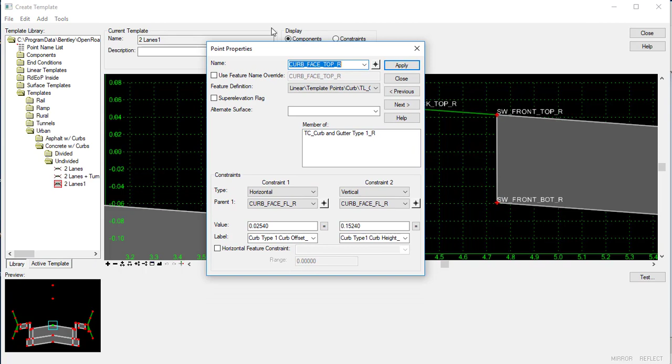So in my template, you need to first check about the option here. So you can check if you double click the point, you will see there's a vertical with this point, and this is 0.15240, and this is a vertical height.

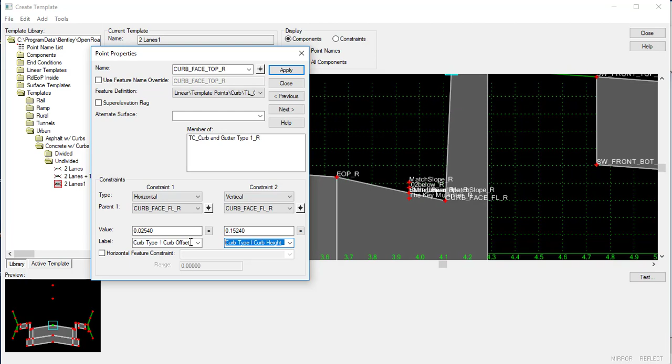I want to change the value, so in vertical this parent value I add a new value called curb design height here. You can use this one. Of course you can also change and test the point control by vertical to see what happens if you change the vertical. So now we do both sides.

So we just save it, and go back to the corridor here. For example, I want to change here. So the first thing I can do is use a tool called parametric constraint. So we can create a parametric constraint.

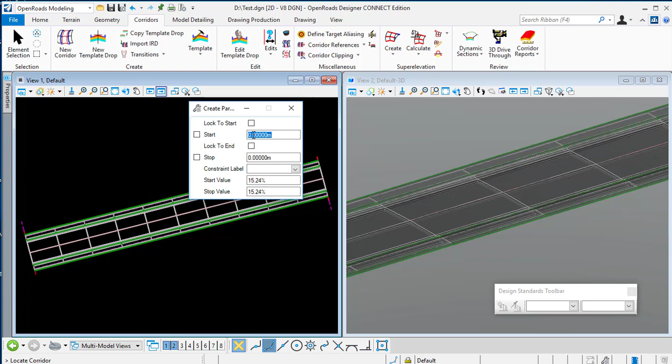For example, I want the curb to start at station 50, and then spend about 0.5 meters to change here.

So what I'm doing to this drop curb, I just select the corridor or linear template. While I'm started, I just create start from 50, enter, lock it, accept, and then go to start from 50.5, lock, and stop here.

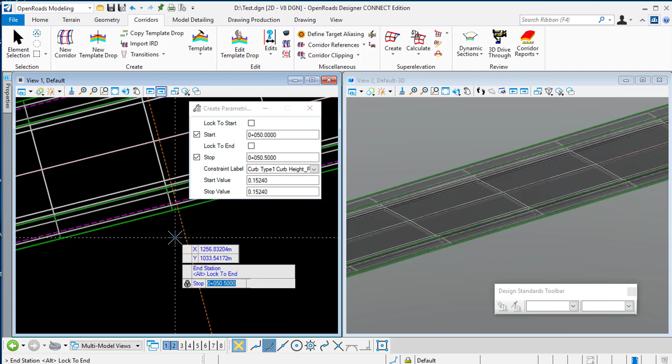So after I accept that, I will change my label here. The label is curb height right hand side. So I just click accept, and then start is 0.1524, start, and then stop will be 0. So I just click accept.

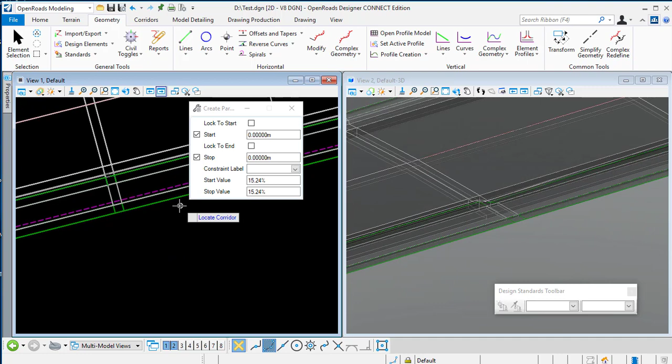And you will see it will start to change the value here. So after changing the value, the next one is you can go back to the corridor here, always using this corridor object. Select this component again and you can see the template drop, or even you will see the parametric constraint here. So it helps you to do it very quickly.

For example, I just copy the setting and paste it here. So the next one you may think about is from 0.5 to here, maybe I need 2 meters.

So I will add 2 meters here, 0.5 as well. So after I start value, it should be 0.0. So it makes sense that from 0.5 meter it changes to 0, about 2 meters, or even I should make it like 4 meters for the car to enter here.

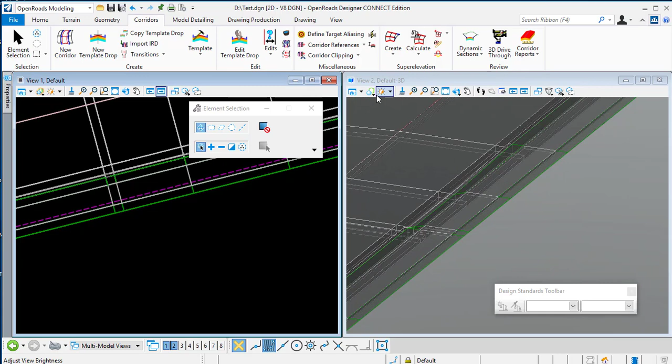So after you change it, if you close it, you go back to the levels here or the model, you will see it will drop a little bit about this. So I just change it, or just change to other illustration so that you can see it. See, it's going to change. You can have a look, it's changing for the vertical.

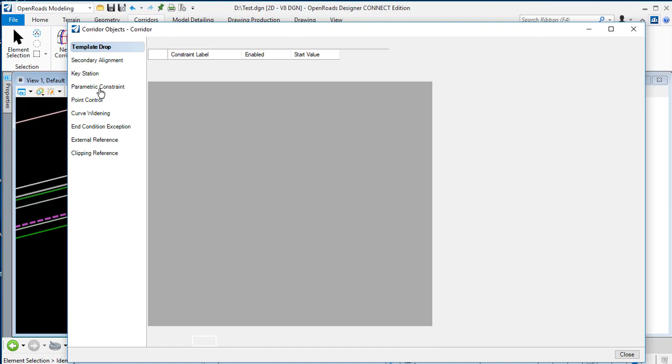So at last, of course it's easier that after we finish it, we go back to the parametric constraint. We copy one again, just paste it. So at the end, we may go to 50.5 to 54.5, and then go back to 0.5 meters at the end, and I will start from 0 back to this value.

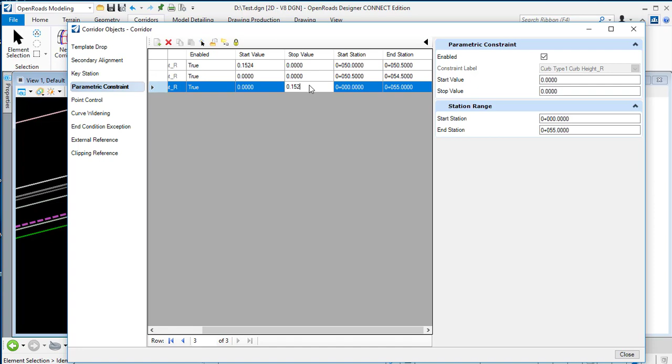Okay, it should be 0.1524, enter, close. So afterward, you will be able to see the change about this value here.

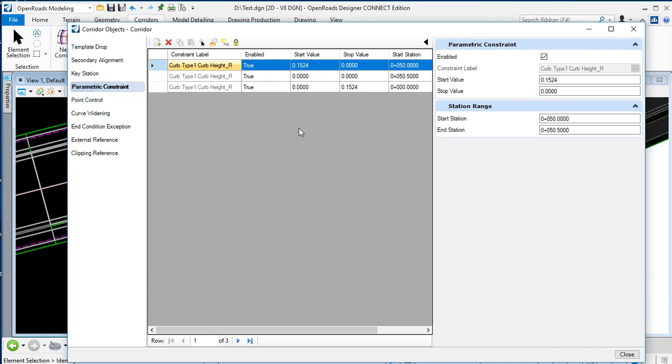So that is what the changing is about. Of course, the new version update 3, and you can also see that in parametric constraint, you have a tool to import using a text file to do it as well. So of course you can also export in a text file so that you can always change, import and export the change here. That's about how to create the drop curb.